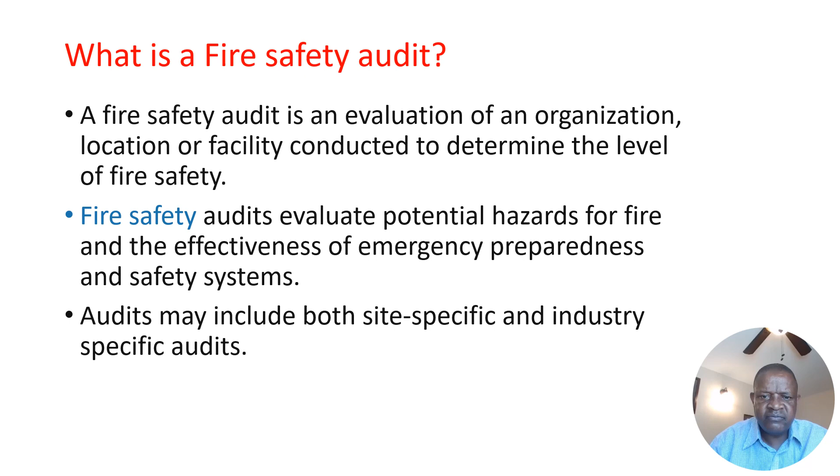Fire safety audits evaluate potential hazards for fire and the effectiveness of emergency preparedness and safety systems. Audits may include both site-specific and industry-specific audits.

Let's look at site-specific audits. Site-specific audits include any location or establishment where people might be affected by fire, or where public health and/or safety is at risk.

Industry-specific audits include any organization or occupation where there is a high risk of fire or that may have a large impact on others if the hazard were to occur. For example, a church is a site-specific location where people might be affected by fire, as is a stadium.

Industry-specific audits include organizations or occupations with high fire risk - for example, KenGen, oil production companies, industries, and hotels - where there is a high risk of fire or a large impact on others if the hazard occurs. For example, if a fire were to occur at the main electricity generation plant in Kenya, it would have a high impact on others. The focus of the audit is to ensure that all areas that may be impacted by the hazard are fully prepared.

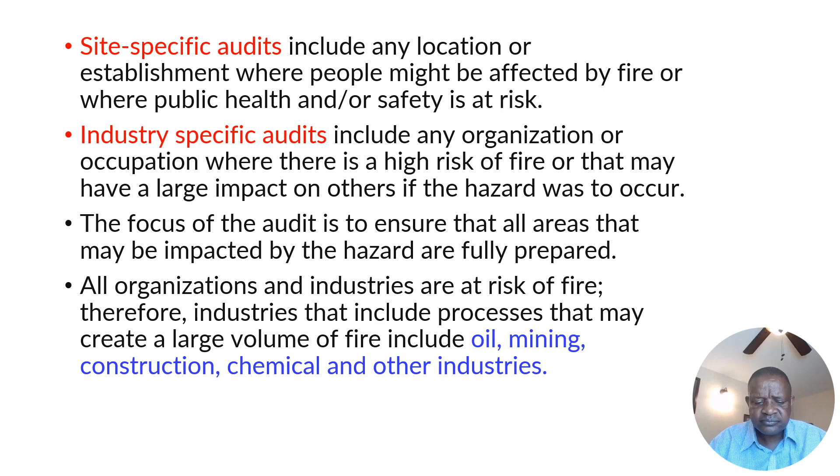Fire safety audits may include reviewing fire prevention, protection, and suppression systems. We are also going in this module to learn more as we continue on fire prevention, protection, and suppression systems.

Reviewing evacuation plans. Reviewing fire safety communication systems. Reviewing emergency response procedures. Reviewing the adequacy of building or fire code compliance. Reviewing fire safety training of employees. These are some of the areas where a fire safety audit may focus.

Industry-specific audits focus on specific industries or organizations where the hazards are created in or by the business. So this will be our main focus because we want to talk about facilities where you work, organizations where you work, and these are related to industry-specific audits.

There are many tools that can be used in fire safety audits, and these tools include extinguishers, fire hydrants, and sprinklers. At your level as a security officer, as a security professional, you should be able to know extinguishers, hydrants, and even sprinkler systems, because fire safety is one of the major areas in security management.

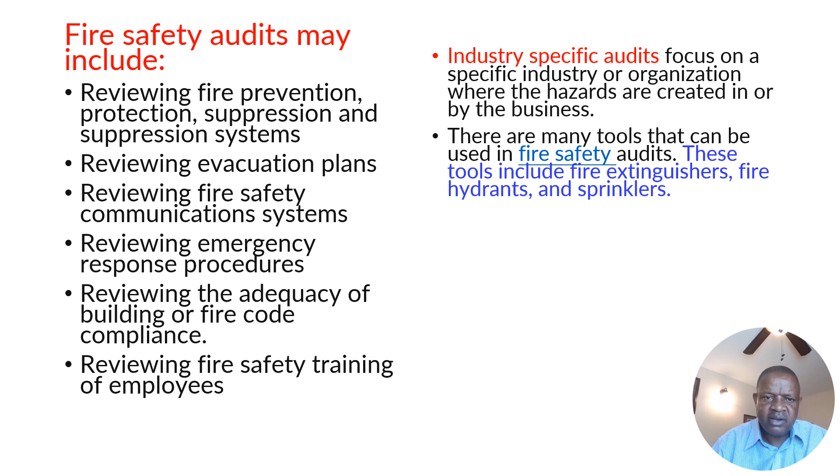Audits can be performed to ensure that an organization is prepared for an emergency and ensure that all employees and contractors that will be affected by the emergency are trained and that any needed equipment is readily available.

I wanted to focus on training, emergency training people, preparing people for evacuations, preparing people to identify fire hazards, preparing people to take proactive action in the event that there is a fire occurrence. These things are very, very important.

Training is very important. A fire safety audit for an organization does not determine that a fire hazard will not occur. Rather, the purpose of a fire safety audit is to ensure that any potential fire hazards have been identified, planned for, and properly protected.

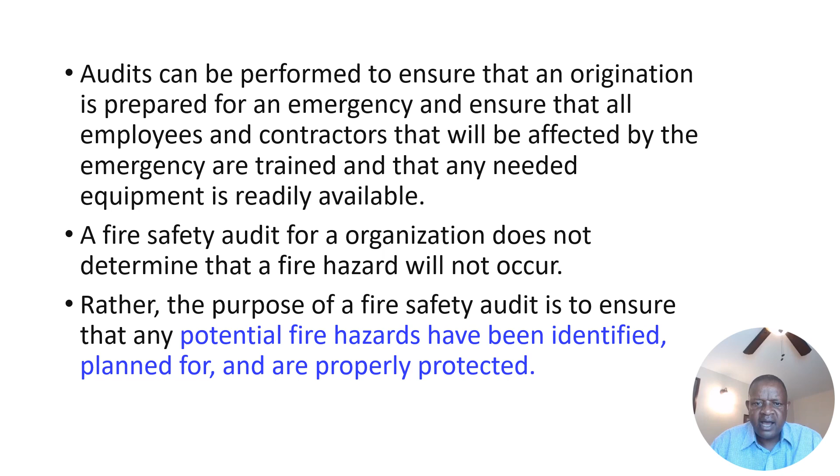You remember we already spoke about fire hazards. So the purpose of a fire safety audit is to ensure that any potential fire hazard have been identified, planned for, and properly protected.

Purposes of fire safety audit. Again, a fire safety audit can be used by any business or organization to ensure that all areas of a business are well protected from a fire. In a fire safety audit, the auditor may or may not check for fire safety violations or may identify fire hazards that are not in violation.

There are three main purposes for the fire safety audit in brief: inspecting for fire safety violations, checking to ensure that all safety procedures and equipment are available and in good working order, and identifying additional hazards that may cause fire or that may increase a fire's impact.

Can you please note that down as I drink a glass of water? There are three main purposes for fire safety audits.

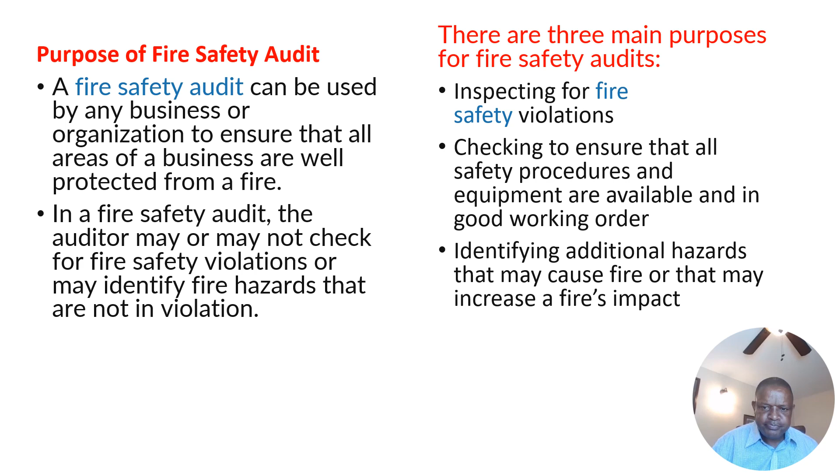Right. There are several reasons to conduct a fire safety audit. What is the reason to conduct a fire safety audit? You may be subjected to an interview. You have applied to join a particular organization as a security manager, and during the board interview, they ask you what are the reasons for conducting a fire safety audit. Then you should be able to explain yourself clearly with confidence.

A fire safety audit can be carried out after a fire or emergency involving the workplace, to detect fire safety issues at an early stage, to evaluate the effectiveness of safety systems in the workplace, to identify the fire safety hazards that may exist in the workplace, and to take preventive actions. If there is any problem in the workplace, the auditor will alert safety and compliance officers so that corrective action can be taken. Conducting a fire safety audit is a proactive measure that can help reduce the risk of fire in the workplace.

I think it is self-explanatory, however, you can pick some points. For example, to detect fire safety issues at an early stage, to evaluate the effectiveness of safety systems in the workplace, to identify fire safety hazards that may exist in the workplace, and to check if there is any problem in the workplace. The auditor will alert safety and compliance officers so that corrective action can be taken. Conducting a fire safety audit is a proactive measure that can help reduce the risk of a fire in the workplace. Those are some of the reasons why we conduct a fire safety audit.

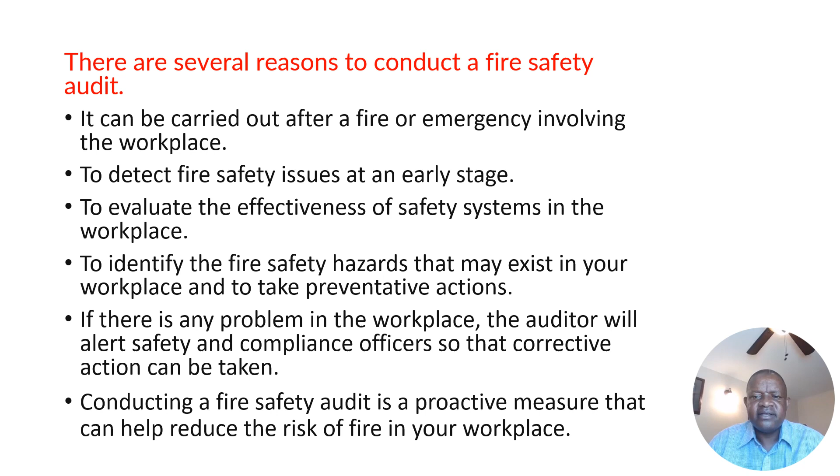The role of the auditor is to identify the current fire safety controls at the workplace, identify any issues that might lead to a fire, record any deficiencies, and take action to improve fire safety at the workplace. The auditors will take any necessary action to improve the current fire safety situation and take precautions to protect the workers. You can hear those are very strong terms.

Auditors may even recommend to the government to shut down your premises because the threat of fire is very high and people are at risk. They will recommend that this premises is not suitable for operation and should be shut down.

So, fire audit services - there exist companies that deal with these inspections or that provide audits to several establishments. It is for you to find out from your level which organizations exist in Kenya, or wherever you are, that conduct fire safety audits.

You may also grow into your career and become a fire safety auditor. There are licensing trainings by the governments, including international licenses that you can study and acquire to become a fire safety auditor, and even establish your own company to carry out fire safety audits. It's a very interesting field, and I hope some of you can venture into it.

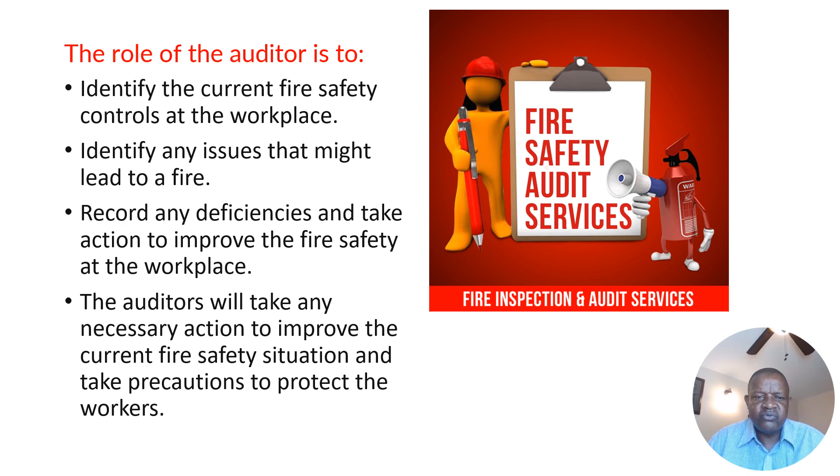Methodology for conducting a fire safety audit involves the following steps. Methodology is the steps, the way, the procedure.

A walk through the concerned premises, with an overview of the layout and drawings. So you must have layout, drawings and plans. You must know what is in place, what operations take place here, and whether it is high risk or what kind of operations occur.

Then an overview of the existing firefighting systems in the premises, and an overview of training and awareness regarding availability and operation of the firefighting systems across the organization. This is followed by recommendations for corrective and preventive actions, and an update of the fire safety risk management database.

Then prepare additional reports or relevant paperwork and send as soon as possible. If necessary, arrange and undertake any follow-up actions, etc. So this is the methodology. Can you please also write down the methodology you need to conduct a fire safety audit?

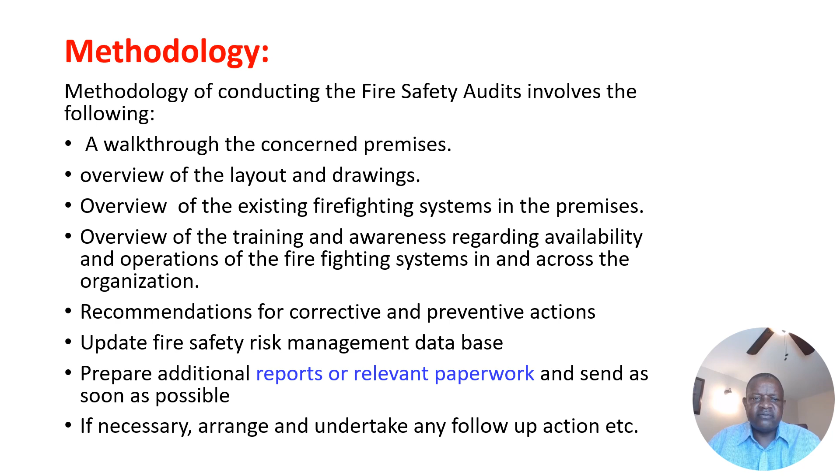I hope you have recorded something down, because the methodology is very important for you to know how to conduct a fire safety audit. So you may do it internally, as I have mentioned above.

Now let's turn our attention to the second part of this presentation, which is fire safety regulations. When you conduct fire safety audits, you base your inspection on existing fire safety regulations and codes. They are sometimes called fire safety regulations, and also called codes. This depends on the country where you are and the jurisdiction.

These refer to a set of rules that specify the minimum acceptable level of fire safety, set and enforced by authorities having jurisdiction, e.g., national governments or local authorities. For example, in our country, overall fire safety management issues fall under the national disaster management, and there are also fire management codes in particular counties. Every different county has its own different rules, regulations, and codes covering fire safety management.

Fire regulations are found in both building and fire codes. Building codes constitute a set of design and construction requirements rooted in the code that must be adhered to during construction of a building - structural, passive fire safety measures. So just remember that building codes must be adhered to during construction.

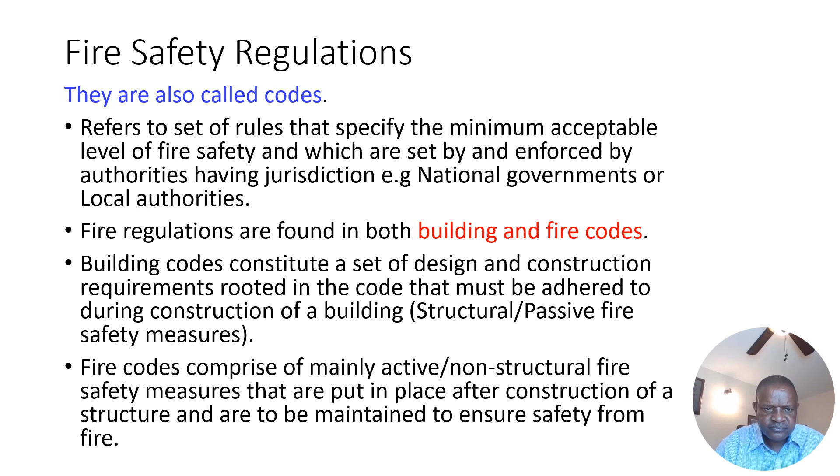So it is the responsibility of owners and operators of structures to build and maintain these facilities in accordance with the building and fire codes. Building inspectors check for compliance with the building codes before a building permit is issued.

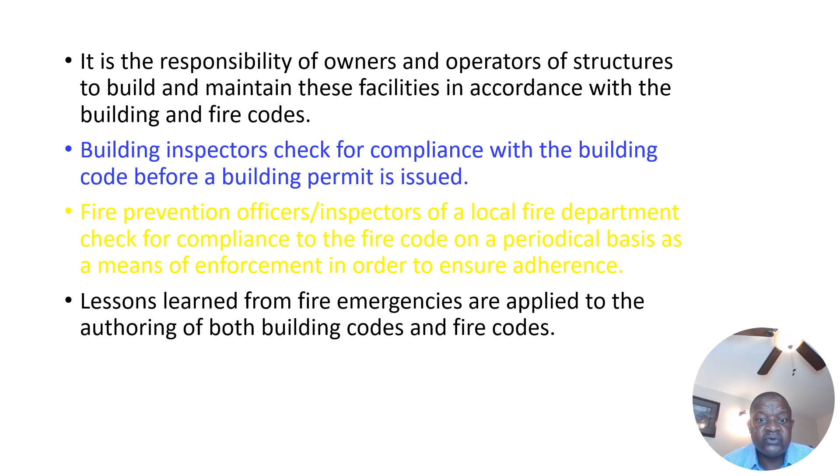Lessons learned from fire emergencies are applied to the authoring of both building codes and fire codes. Fire prevention officers and inspectors of the local fire department check for compliance to the fire code on a periodical basis as a means of enforcement, in order to ensure adherence.

Regulations can be mandatory or obligatory. Mandatory means it is a must; obligatory means it is not strictly a must, but you have to do it. Mandatory regulations have to do with construction and design measures that must be adhered to during construction, and the owner of the building is liable to prosecution if he or she disregards these requirements. This includes measures regarding fire exits, outside staircases for tall buildings, installation of fire equipment, and use of fireproof materials in construction, among others. Obligatory regulations cover protection of individuals utilizing the premises.

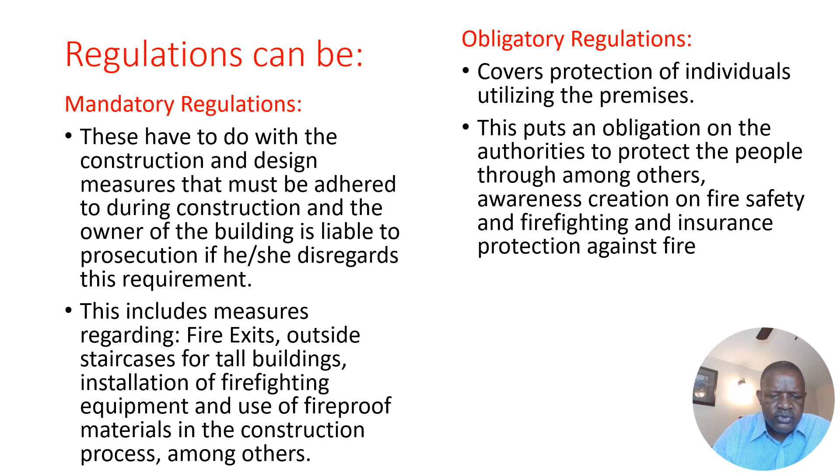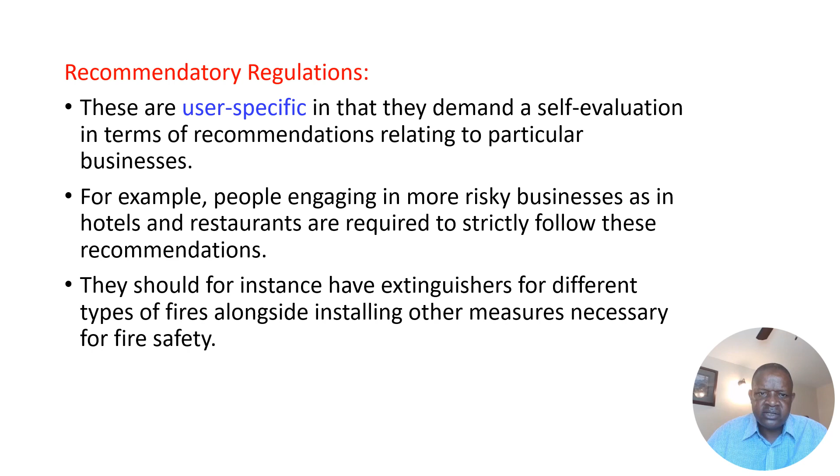This puts an obligation on the authorities to protect the people through, among others, awareness creation on fire safety and firefighting, and insurance protection against fire. We also have recommendatory regulations, which are user specific, demanding self-evaluation in terms of recommendations relating to a particular business. For example, people engaging in riskier businesses, such as hotels and restaurants, are required to strictly follow these recommendations, having extinguishers for different types of fire alongside other necessary fire safety measures. So we have mandatory regulations, obligatory regulations, and recommendatory regulations, which are user specific.

Other safety issues in a fire code include certification of servicing, placement and inspection of equipment, and general storage and handling of flammable materials, which is very sensitive, including limitations on locations, quantities, and specifics of flammables. There are also permits and limitations in various building occupancies, such as maximum occupancy, removal of interior and exterior obstructions to emergency exits or firefighters, and removal of materials. There are also permits and limitations for special outdoor applications, such as tents, kettles, and bonfires, plus other hazards like flammable decorations, welding, smoking, bulk matches, and tire yards, among many other measures. These are the other safety issues covered in a fire code.

Requirements depend on the jurisdiction, country, or county. For example, in Kenya, codes differ by region due to different weather conditions. The coastal area, the eastern area, and the western area will have different codes because the environments are different - facilities exist in environments that differ. The coastal area is very salty, so equipment rusts faster due to the salty environment, so codes require inspections every 3 months there, whereas in other areas codes require inspections every 6 months. So codes differ depending on jurisdiction.

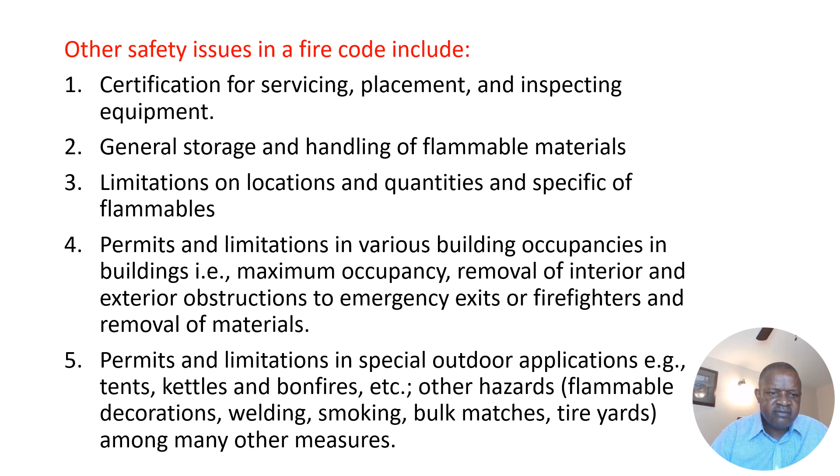Internationally, there is the International Fire Code developed by the International Code Council, which contains provisions to regulate fire hazards in existing buildings, as well as provisions for installation, testing, and maintenance of fire protection features in both new and existing buildings internationally. Locally, fire regulation is disjointed and scattered across various pieces of legislation, such as the Local Government Act, Occupational Safety and Health Act, Grass Fire Act, Petroleum Act, Chiefs Act, and Building Code, among other acts. For more details, refer to the Kenya Fire Safety Policy.

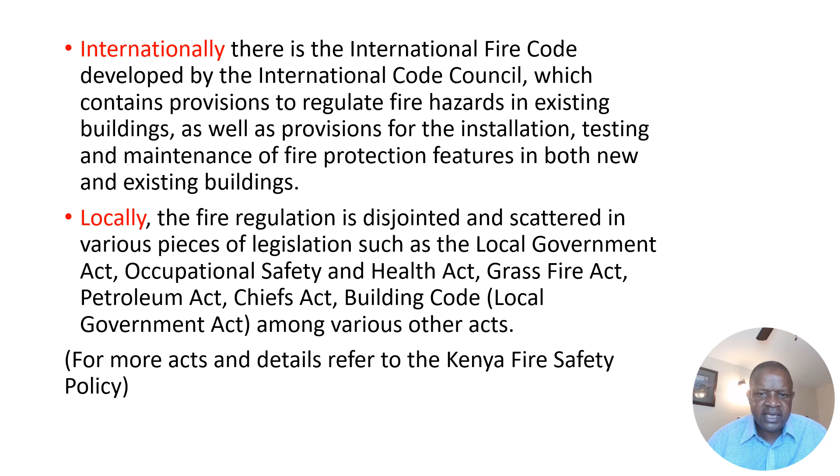We also have fire safety standards, in addition to regulations and codes. Fire safety standards refer to the attainment of a desirable quality, excellent levels, or degree of quality or excellence in terms of fire safety measures. Standards are ideal levels that players in fire safety management aspire to attain. Fire safety standards help in ensuring uniformity, compatibility, interoperability, safety, repeatability, and quality.

Examples of fire standards include, internationally, the ISO (International Organization for Standardization) standards on fire safety management. Locally, the Kenya Bureau of Standards (KEBS) standards on fire safety. These are areas a security professional should understand, since you may find yourself in forums discussing fire safety standards. It's also important to know these so that when you base your auditing or internal inspections, you know which standards you are following.

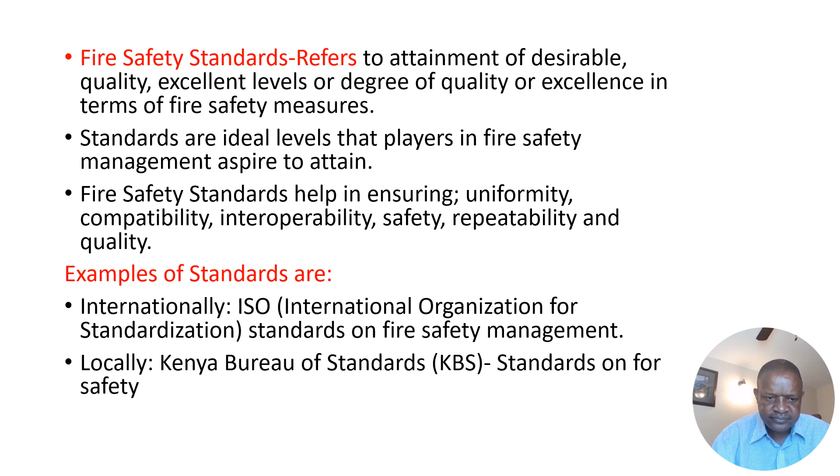We also talk about fire safety policy. These are guidelines which provide for establishment and maintenance of fire safety measures. Put differently, it entails a course of action to ensure fire safety. Policies may or may not be enforced. They can inform legislation, be passed into a code, or be derived from codes and customized to meet the demands of an individual organization.

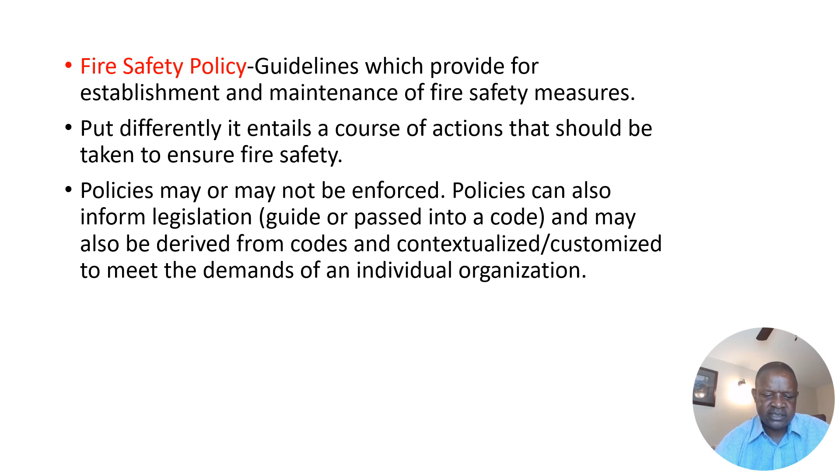Key elements of fire safety policy include building a facility in accordance with the local building code, and maintaining a facility and conducting activities in accordance with the provisions of the fire code. This is based on occupants and operators being aware of the applicable regulations and advice.

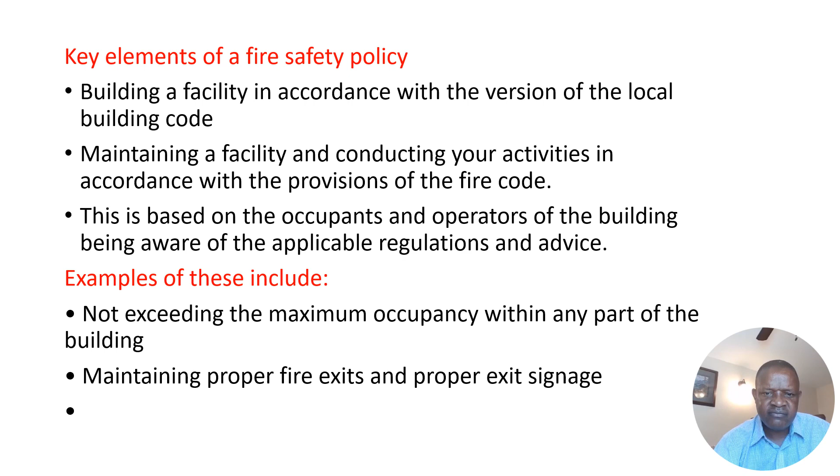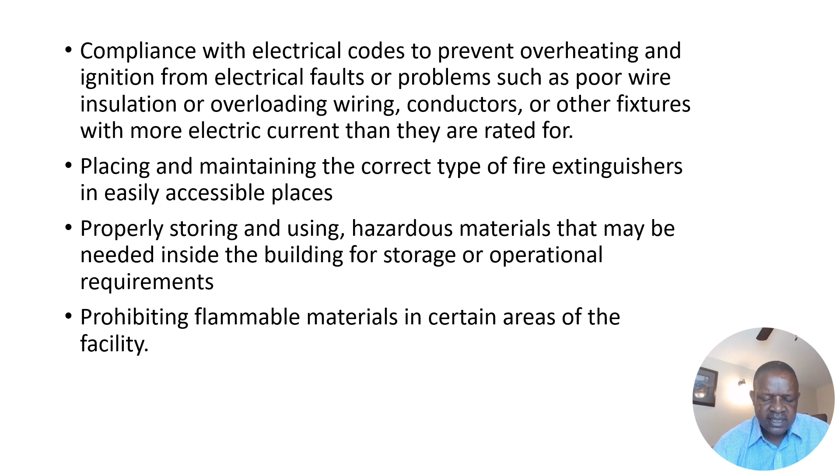Examples include not exceeding the maximum occupancy within any part of the building, maintaining proper fire exits and exit signage, compliance with electrical codes to prevent overheating and ignition from faults such as poor wire insulation or overloading conductors and fixtures beyond their rating, placing and maintaining the correct type of extinguishers in accessible places, properly storing and using hazardous materials needed for storage or operational requirements, and prohibiting flammable materials in certain areas of the facility. These are some of the policy requirements to keep in mind.

Also, periodically inspecting buildings for violations, issuing orders to comply, prosecuting or closing buildings not in compliance until deficiencies are corrected, or condemning them in extreme cases, maintaining fire alarm systems for detection and warning of fire, ensuring sprayed fireproofing remains undamaged, and maintaining a high level of training and awareness among occupants and users to avoid obvious mistakes such as propping open doors, and conducting fire drills at regular intervals throughout the year.

Fire drills must be conducted at regular intervals throughout the year. We forget this a lot, and as security professionals we never conduct fire drills — we don't arrange for them, fearing what will happen. But that is not the way to go. The way to go is to conduct fire drills at regular intervals throughout the year.

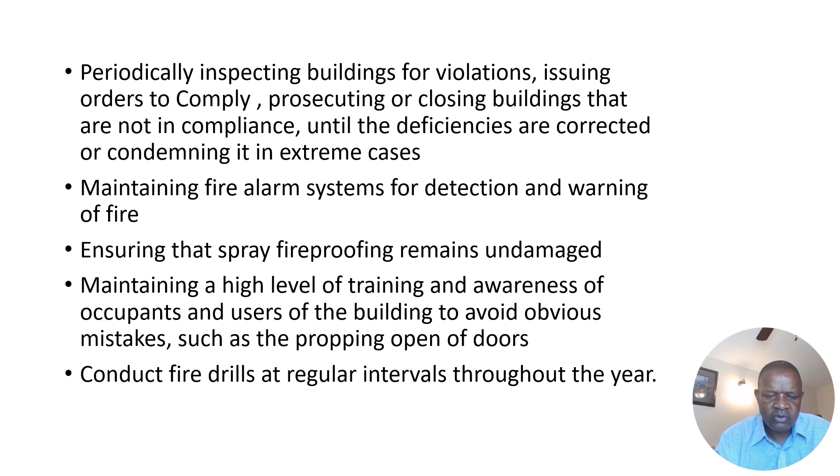Locally, the fire safety policy is awaiting adoption by the government. I'm not sure whether it was adopted by the time I was preparing this presentation, as that was quite some time back — please check for me whether the Kenyan fire safety policy was adopted. Its overarching objective is to harmonize safety regulations in the country to ensure a coordinated approach in prevention, preparedness, response, and recovery from fire hazards, guaranteeing fire safety. Other national policies that recognize fire as a major risk and provide measures to manage fire safety are the proposed National Policy on Disaster Management and the National Housing Policy.

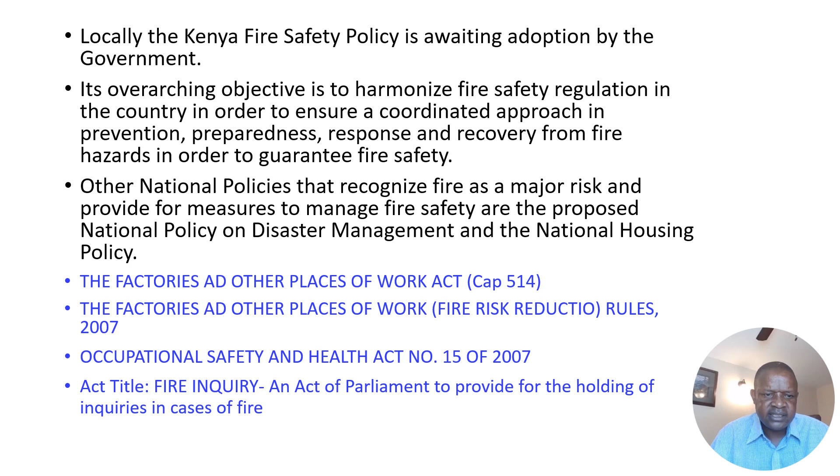The Factories and Other Places of Work Act also covers a lot of fire issues, as does the Factories and Other Places of Work Fire Risk Reduction Rules 2007. Also, the Occupational Safety and Health Act No. 15 of 2007 contains codes, regulations, and policies related to fire safety in Kenya. And there is an act called the Fire Inquiry Act, which police use — an act of parliament providing for the holding of inquiries in cases of fire, on which police base their inquiries.

Let me say something here. As a security professional, strive to be a professional in a particular field. For example, you can work very hard, still be in security management, but become very effective in fire prevention. You can still be in the security field and deviate your licensing and most of your training to occupational health and safety. You can still be a security manager but strive hard and become licensed in CCTV surveillance. At least try to acquire a licensing in one of the areas.

For example, me, I like to say it because it is my effort. I have been licensed as a Certified Security Management Professional by ISMI UK. Strive to become, yes, a security professional, but you cannot manage all these things, my dear friend. Strive to be at least a professional in one area where you are licensed. Like now, fire safety issues are very important. If you get licensing in fire safety, I can tell you, you'll be moving in the right direction. Thank you.

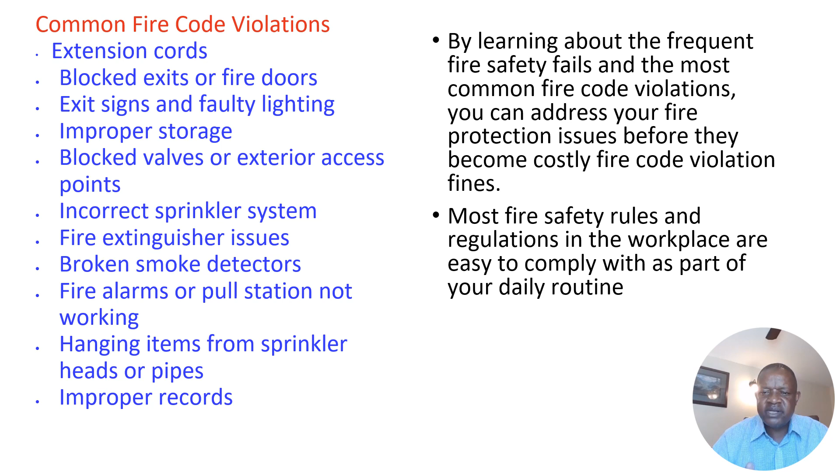By learning about the frequent fire safety fails and the most common fire code violations, you can address your fire protection issues before they become costly fire code violation fines. Most fire safety rules and regulations in the workplace are easy to comply with as part of your daily patrol routines. When patrolling, you can easily check whether there are fire extinguisher issues, whether smoke detectors have been broken, or whether items are hanging from sprinkler heads. This is very easy to carry out in your daily duties. However, due to the kind of operations, we usually get caught up in so many issues that we fail to follow up on these things.

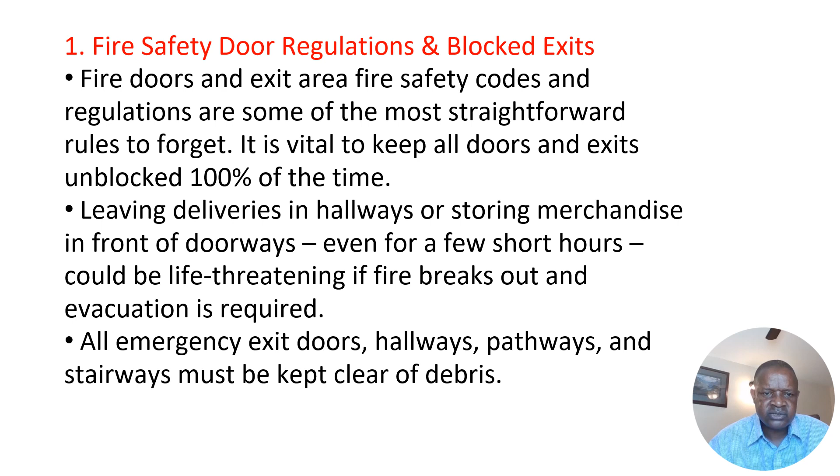So, fire safety door regulations and blocked exits - this is violation number one. Fire doors and exit area fire safety codes and regulations are some of the most straightforward rules to forget. It is vital to keep all doors and exits unblocked 100% of the time. Leaving deliveries in hallways or storing merchandise in front of doorways, even for a few short hours, could be life-threatening if fire breaks out and evacuation is required. All emergency exit doors, hallways, pathways, and stairways must be kept clear of debris. This is your job as a security professional. There should be a checklist at your workplace that you use during patrol, and these are some of the things that should be included in the checklist.

Additional fire safety regulations: building occupants must be able to open all exits quickly and easily. There should not be a special tool, key, or any unusual way of opening an exit door to leave the building safely. Just as exits must be easy to open, they must also be self-closing to avoid being accidentally left open.

NFPA 80 codes require fire doors remain closed at all times, except when being temporarily held open by an approved device. They require doors remain closed, not locked. Being closed and locked are two different issues, so fire doors should not be locked, but they should remain closed.

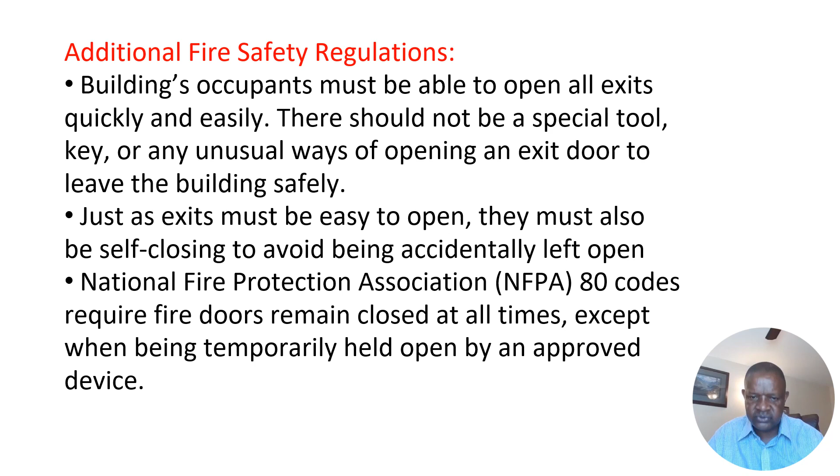Number 2: improper use of extension cords. This is one of the most severe code violations one can commit, and it's still one of the most common. Extension cords are designed for temporary use only and become a fire hazard if used permanently. Never attach extension cords to each other, to permanent fixtures, or pass them through holes in the wall. Get rid of extension cords and add more outlets.

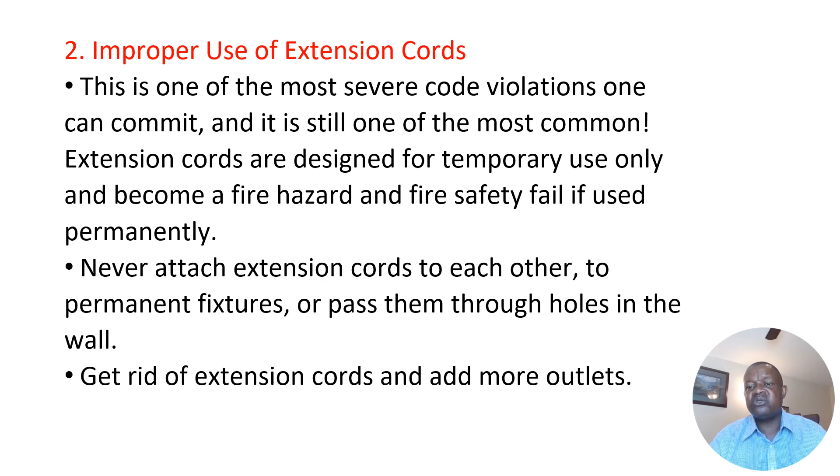Number 3 is fire safety signage regulations. This is failure regarding non-illuminated, flickering, blocked exit signs, and faulty lighting. Non-illuminated or blocked exit signs are common code violations found in businesses, which are easily fixed to prevent unwanted fines. This is an important part of the fire safety code and regulations.

All commercial buildings are required to have illuminated and unblocked exit signs, and most are required to have emergency lights that remain lit for 90 minutes during power outages.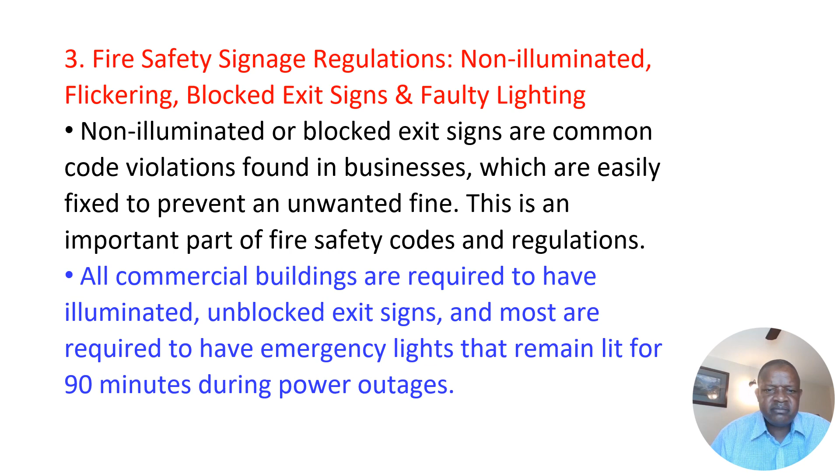Therefore, these must be tested and certified annually in order to pass fire safety inspections. Exit signs require backup batteries so occupants can safely evacuate in the dark, while emergency backup lighting inspires calmness for smoother evacuations. Code requires exit signs and lighting to be checked monthly. It is also wise to change exit sign batteries, as you do with smoke detectors, on the same day every year. Take note of that.

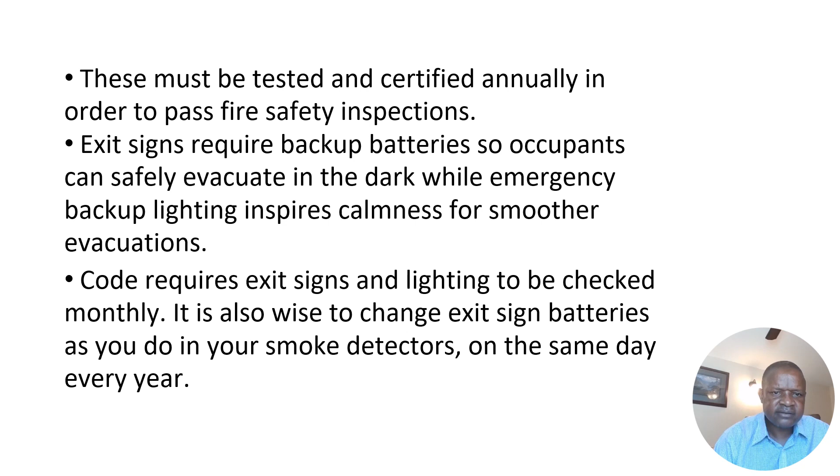Even at some locations where fire extinguishers are placed, called fire points, you'll find cabinets. These cabinets, where fire extinguishers are placed, are often used by housekeeping or engineering staff to store rags, brooms, and tools. You should always be on the lookout and remove these items, and have a strong policy at the workplace that no items be stored at fire locations, including fire pump rooms and riser rooms.

Fire pump and riser rooms are not the place to house anything other than fire protection equipment. In the event of a fire, emergency personnel need to get into the space to work, and extra items prohibit or slow their ability to access the equipment. So be very strict on this at your workplace, and don't allow people to turn fire locations into storage areas.

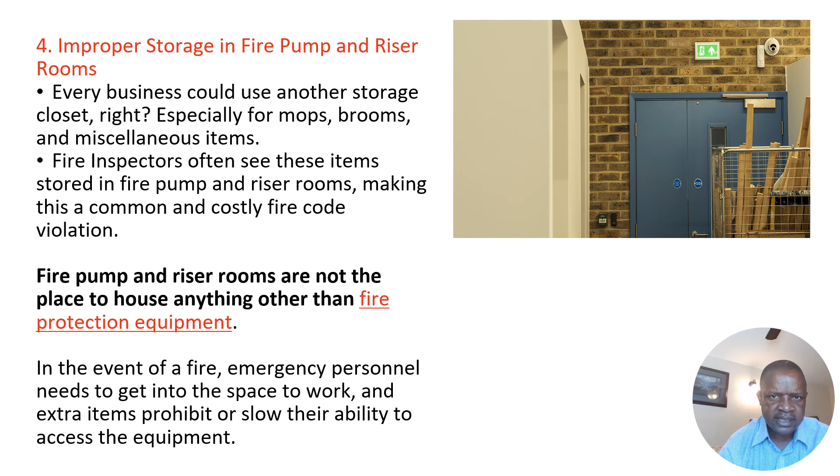Another issue is blocked exterior fire department connections and valves. Landscaping such as trees and boulders, or business equipment, pallets and dumpsters, are often in the way of the exterior fire department connection (FDC) and other access points, which is a common fire code violation. Always patrol and ensure that landscaping, pallets, and dumpsters are not kept in the exterior fire department connection areas.

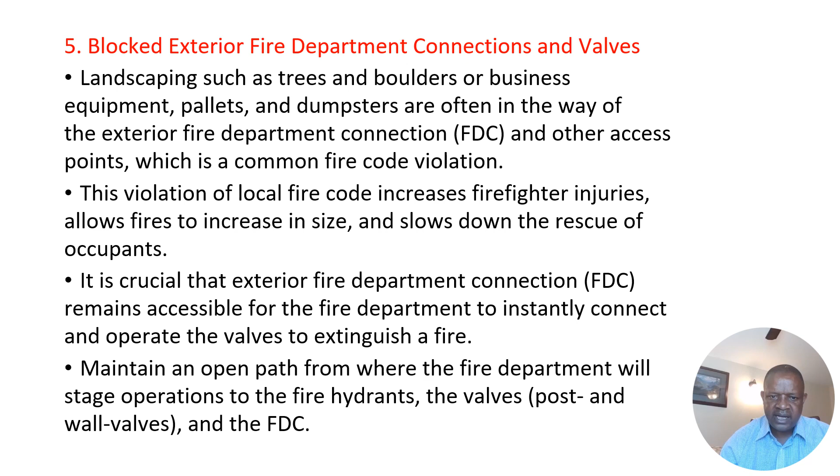It is crucial that exterior fire department connections (FDC) remain accessible for the fire department to instantly connect and operate the valves to extinguish a fire. Maintain an open path from where the fire department will stage operations to the fire hydrants and valves. And then also, we have the issue of an incorrect fire sprinkler system.

If the organization is in a building originally built for other purposes, do you know if your fire sprinklers are up to local codes for your company's current business purposes? This is for you to check. For example, if a big box store is located in a building that used to be a storage warehouse, there will be vastly different sprinkler requirements for the space, commodities, and occupancy. If the fire sprinklers are not updated to match the design and hazard classification, this is a code violation, and this mistake is surprisingly common.

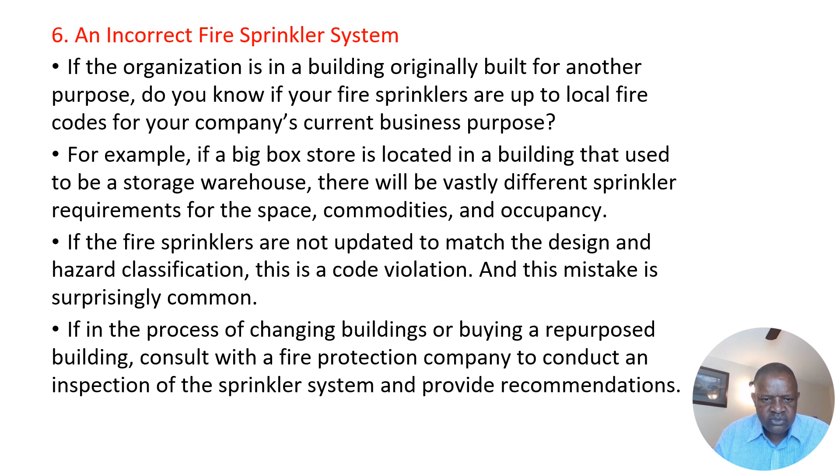If in the process of changing buildings or buying a repurposed building, consult with a fire protection company to conduct an inspection of the sprinkler system and provide recommendations. So for sprinkler systems, suppose we have just moved into a new building. We are putting up a restaurant, and the building was not a restaurant before, it was a store. We need to confirm that the sprinkler system in place is suitable for that place. This can only be done by consulting a fire protection officer or a fire protection company to conduct an inspection of the sprinkler system and provide recommendations.

A most common issue for you to check on a constant basis is missing fire extinguishers. Missing, damaged, or partially used fire extinguishers are especially common at many organizations. Not having proper fire extinguishers as per relevant regulations is a common violation. To avoid violations and fines, ensure there are fully charged working fire extinguishers that are classified for each area of your building. We are going to see the classification of fire extinguishers and how we use them on which classes of fire. All fire extinguishers should also be inspected and serviced annually by a certified and professional fire protection company. After every use, they should be refilled and inspected. Ignoring preventive inspections and maintenance results in more violations.

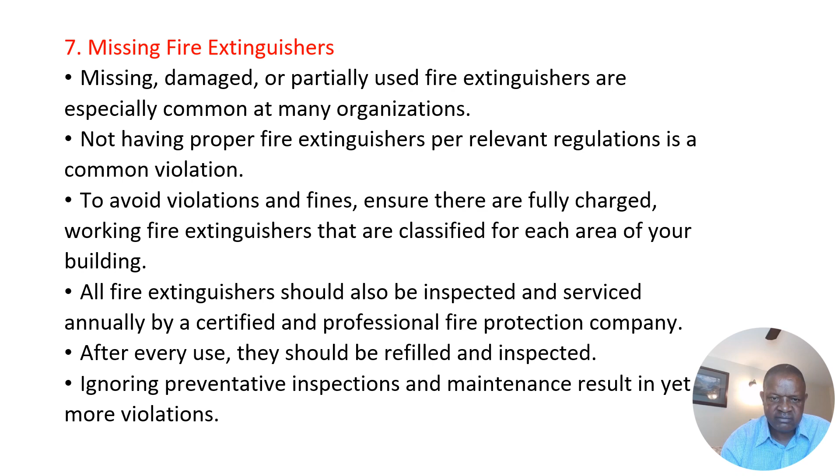So, fire extinguishers—as you can see, missing. If there's a missing fire extinguisher at a particular fire point, you know there are regulations that say after every certain length of the building, there should be fire extinguishers. There should be a fire point. A fire point is where we have fire extinguishers.

Missing fire equipment—you have to report it.

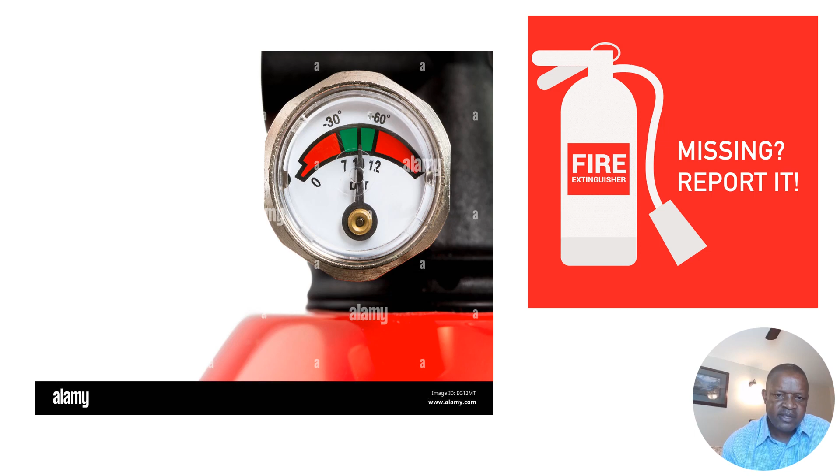Then we also have faulty smoke detectors. Large facilities have the hardest time keeping up with missing or faulty smoke detectors. When a smoke detector battery runs out, it starts chirping, and technicians are too busy to deal with it at that moment. To avoid this annoyance, technicians may be tempted to remove the battery or unhook the wiring of the smoke detector and take it down, only to forget it's missing. An unworking or missing detector is a serious fire code violation and poses a threat to people's safety. When a smoke detector chirps, address it immediately—it may need replacing or a new battery. To ensure they all work for the same amount of time, replace batteries on the same day every year. Detectors should be replaced every 10 years, whether they are working or not.

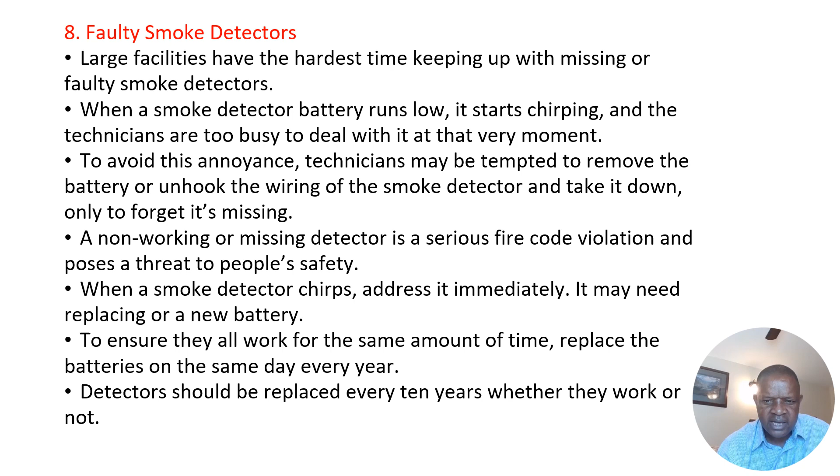Unmaintained fire alarms and fire protection systems maintenance. I worked with one general manager at Republic of Maldives called Mr. Igor Dolazel. He was very good because he insisted on proactive maintenance, not waiting until things break down before going into maintenance or servicing mode. He was always speaking of proactive maintenance, conducting servicing and maintenance of equipment before they break down.

Fire alarm pull stations and other fire protection systems are often not tested or inspected as required, which is a common code violation. It is quite easy to forget to test this, especially when blocked by merchandise and other goods or equipment. Fire alarm pull stations should not be blocked and must remain visible to occupants, and for your fire protection company to test and inspect them as per codes.

All fire alarms and their components must be tested annually by a licensed technician, who should also inspect all aspects of the fire protection system, including but not limited to the fire sprinkler system, standpipes, and fire pumps. A written log of these inspections is also required.

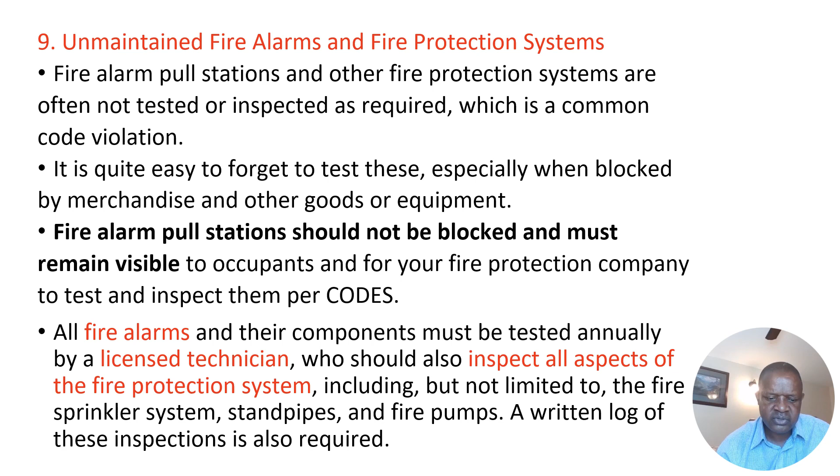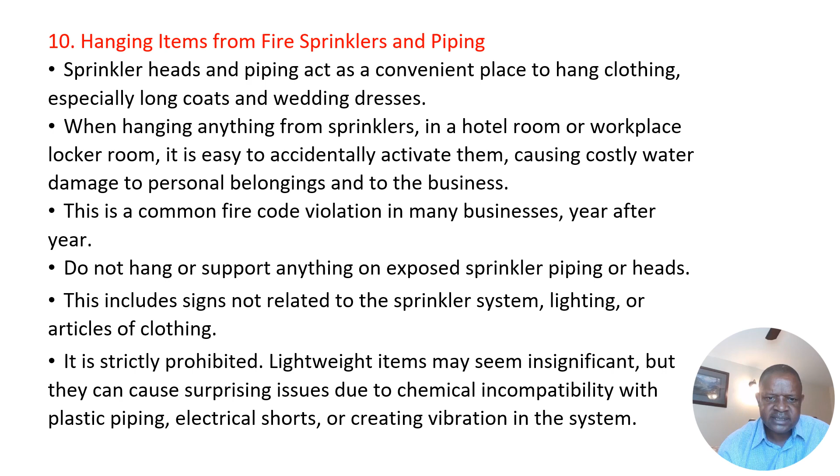Another issue is hanging items from sprinklers and pipings. Please ensure no items are hung on sprinklers and pipings. Do not hang or support anything on exposed sprinkler pipes or heads. It is strictly prohibited. Lightweight items may seem insignificant but may cause surprising issues due to chemical incompatibility with plastic piping, electrical shorts, or creating vibration in the system.

Another violation is not keeping proper records. The fire protection company that maintains the fire protection systems should provide written records of services, maintenance, and inspections. If there are several different contractors to inspect, maintain, repair, and replace fire safety systems, it can be a challenge to keep up with who has done what and when, and to find the required paperwork when needed. That is why not keeping proper records is a big violation.

Keeping records is something we talk of nowadays. We like saying that we are going to keep records in automated systems, which is okay - we automate everything, we put things in systems everywhere. However, from my own experience, I still insist that manual records are very important. Checklists, occurrence books where security officers and guards write things - these are still very important records, because systems collapse, systems develop issues, and you lose information and records. If you do not have a manual backup, and a situation arises, you'll be in a very, very difficult position.